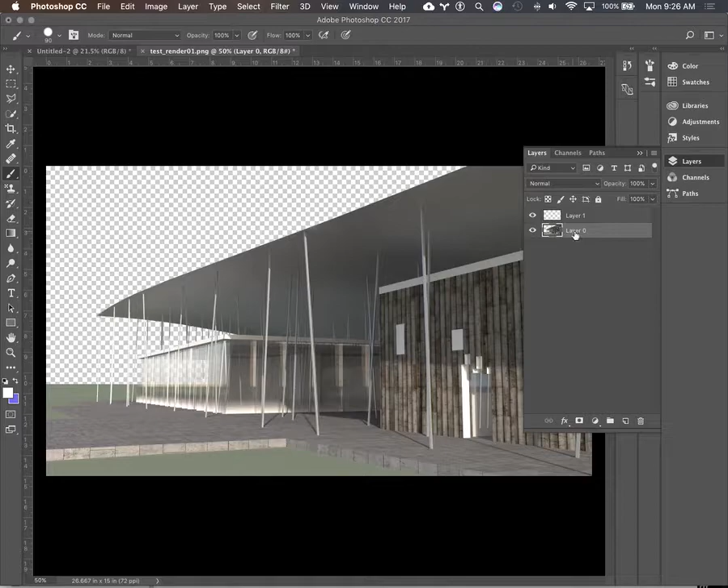Open up my layers, and I'm going to create a new layer. I'm also going to duplicate this layer—duplicate my rendering, because I want to make sure I can utilize that and always have one I can go back to. Sometimes if there's a little lock here, you can click that and unlock it. I'm just right-clicking and choosing duplicate layer.

I'm going to name it, and I'm going to turn this off. So this is the one that I'm going to start working on.

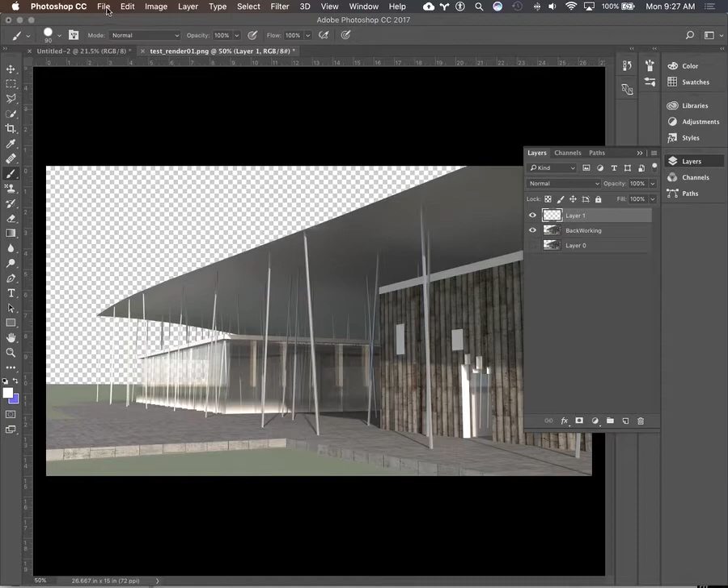I'm going to go to File, and we have two options here: we can place embedded or place linked. When we place a linked file, that means it's linked to that image, so it's always going to go back and reference it. It does two things—one, it makes the file a little smaller because it's only creating a link to it, and it allows us to go back and replace that, and it works really well.

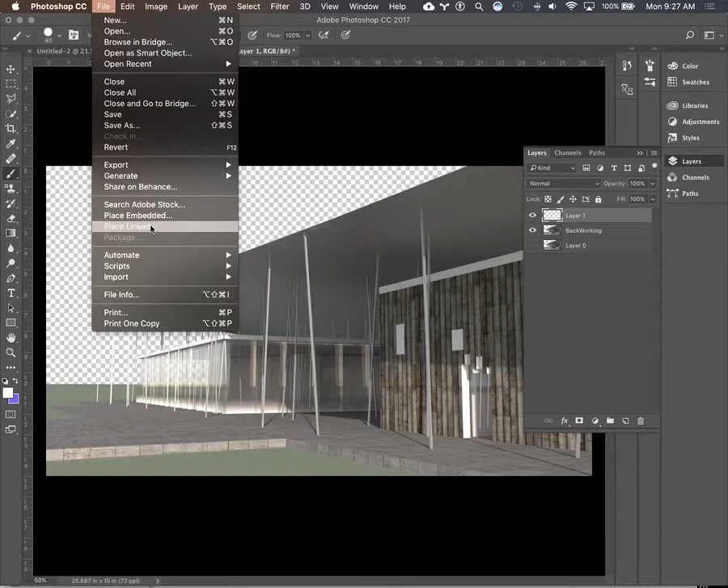The thing you have to remember is that if you're going to share this file with somebody else, you have to package all of those links together—it has to be sent with everything, so you have to almost zip everything together. Otherwise, I'll open it up and it won't link to that file and won't work. But it's a good habit to use linked, so I'm going to do that.

I'm going to go to my textures and use that edge, place that in there. As it's placed in here, to work on it, I might choose multiply so I can see where it's at in relationship to my horizon line and things of that nature—so that's just by selecting multiply. Now you can see here's my horizon line, and here's the horizon line for this.

So I really need to start to bring that down and get that aligned. One thing you could do is stretch this out and make it bigger, and I might not need to replicate the sky.

So if I hold down the Alt key and scroll, I could grab this thing up here and make it bigger and scroll it down. But what I don't like about that is it makes the trees a little too big for what I'm looking for, so I'm going to go back to just making it the width.

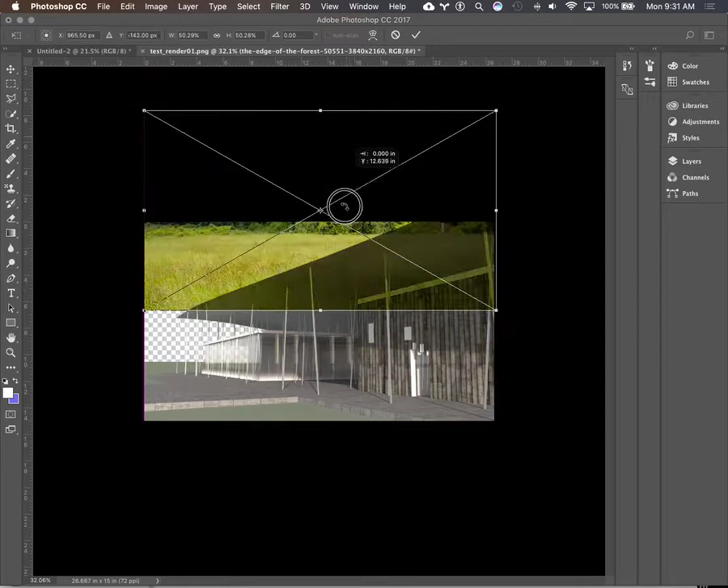And dragging this down—now, one thing you can do also is that when you hold the Shift key and move something around, it will snap to straight lines. So if you just want to move something straight up, hold down the Shift key. If you want to keep it in the same aspect ratio, just use that Shift key.

Okay, so once you have it in place, you just hit Enter and it's locked into place. Go back to my layers and go back to normal. Okay, so the first thing is we have a problem in terms of it being in front.

So I can drag this below—now that it's in the background, you see there's a bunch of stuff that isn't working for us, in terms of we're going to have to get rid of this around here so we can start to see that grass come out into the foreground.

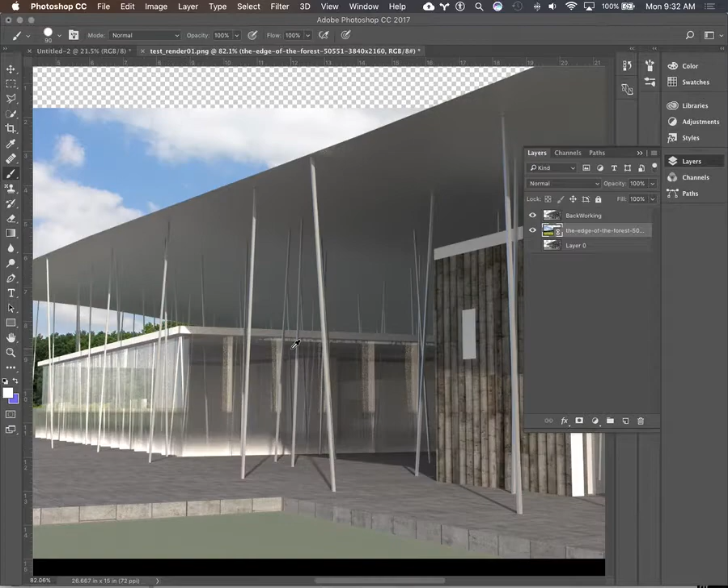But there are a couple things that are really starting to be nice about that texture and those trees in the background. One is that we have this kind of white box, and this darker tree line solidifies that and emphasizes, creates a contrast here, which is going to be nice to keep our eye. The other thing is that this horizon line, along with the angle of this roof, starts to give us some arrows for the eye to come in and then come back into the image.

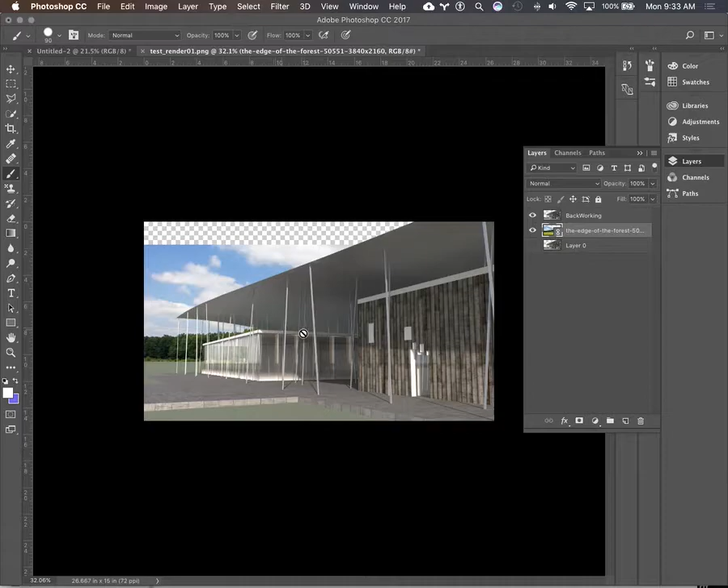So you always want to think about how to draw people's eyes back to where they are, using contrast, using color, and using angles of the perspective. Those are all important.

So the next thing we're going to do is start to layer mask out these areas so that we can take out areas of the image. I want to do it in such a way that I'm not destroying this main image, so I'm going to do that using layer masks.

Right down here is Add Layer Mask under the menu. It looks like a rectangle with a circle in it. I'm going to select that, and now we have a layer mask. I'm going to zoom in here.

We want to get rid of this kind of green area. So making sure that the layer mask is selected, I'll look at a couple of different ways. Since I have a flat background, a single color, I'm going to try the Magic Wand tool. It allows you to just select an area that's all the same color, and if I hold the Shift key down, I can keep adding to that selection.

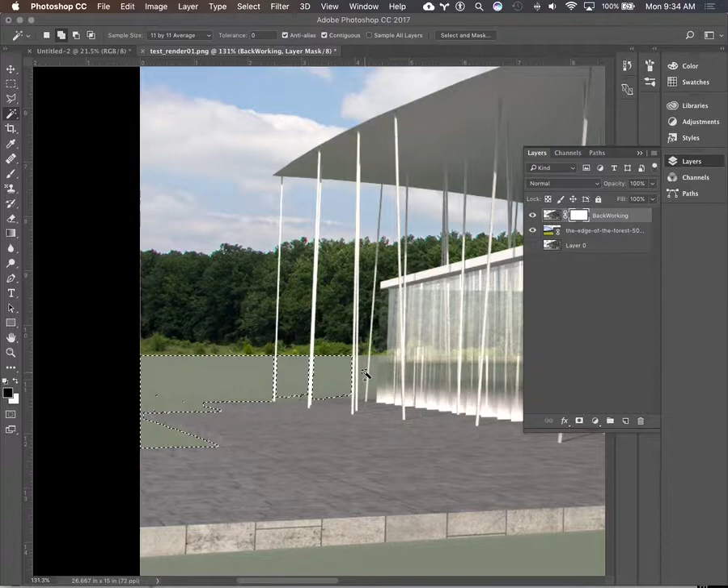But there you see I start to have some problems because the tonal values all start to become an issue. So I can do Control or Command Z and back up. Then I might look at these different sample sizes up here. Right now it's doing an 11 by 11 pixel average. If I want a tighter tolerance, I might start by saying just give me a 3 by 3 average, and I'll test that out.

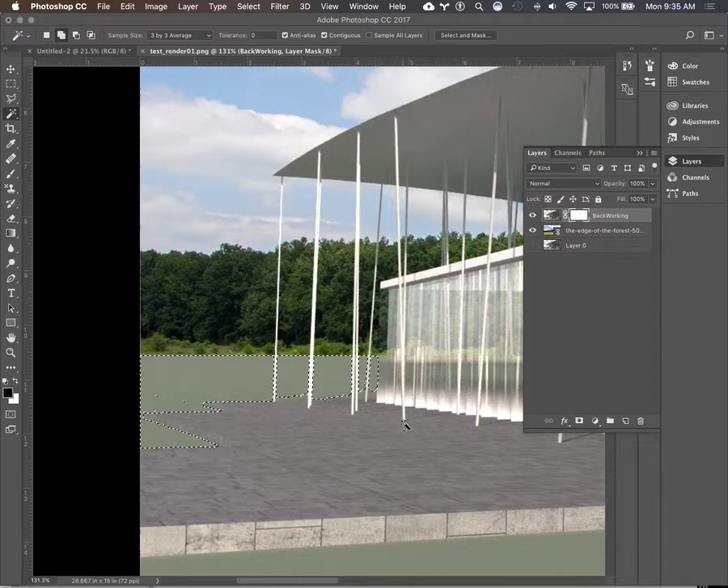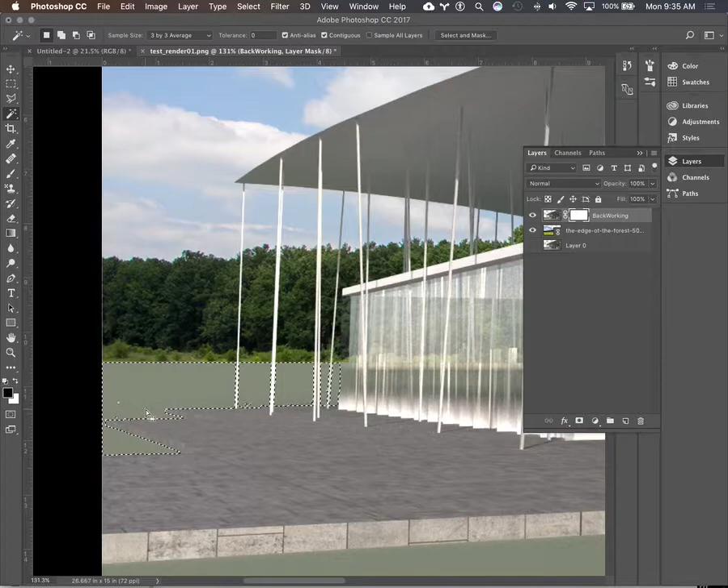And that's working much better. You can zoom in here. I'll just start to clean this up a little bit using the Alt key and the zoom. You'll notice I have some fireflies here that are going to be there - I'm going to fix those a little bit later.

So I'm going to come over here. See, now we're starting to see that, okay, I got a big problem there. So I'm going to Control Z to undo that, and this is where I might turn my setting back to the 11 by 11 average. Holding the Shift key down gives a little plus you can see. Okay, that's a little bit better - that's going to be my first start.

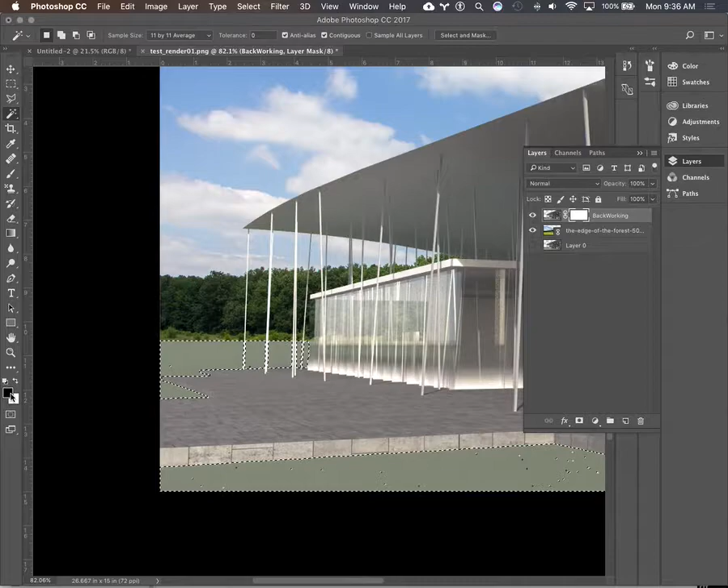You'll notice that the background is white, and what I'm going to do is fill that with black. So I'll do Edit, Fill, and I want that to be black. Now that we have that layer mask, it's giving us our first continuous selection. Doing Control or Command D gets rid of the selection.

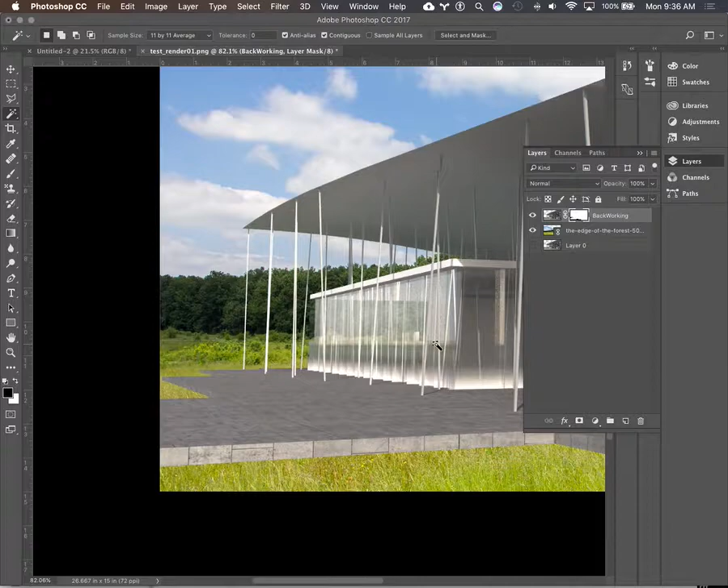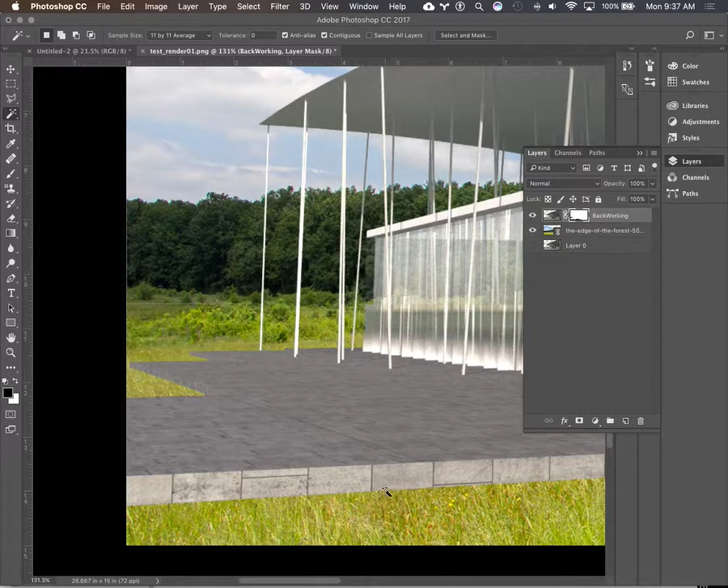So I'm going to come back in here, and I know that right now it's looking okay, but not great - it looks like this thing is floating over there. So a couple of things we want to do is adjust the layer mask to let some of that grass pop up in a more natural way along this edge. We can do that by painting over that layer mask.

Taking this layer mask, making sure that's selected, I can go to my paintbrush tool over here on the side, and I'm going to look at a different brush. Opening up the brushes right up here, we have a selection of different brushes - there's some grass if you scroll down a little bit, these grass brushes. It looks like a single or a triple kind of grass. I'm going to select that.

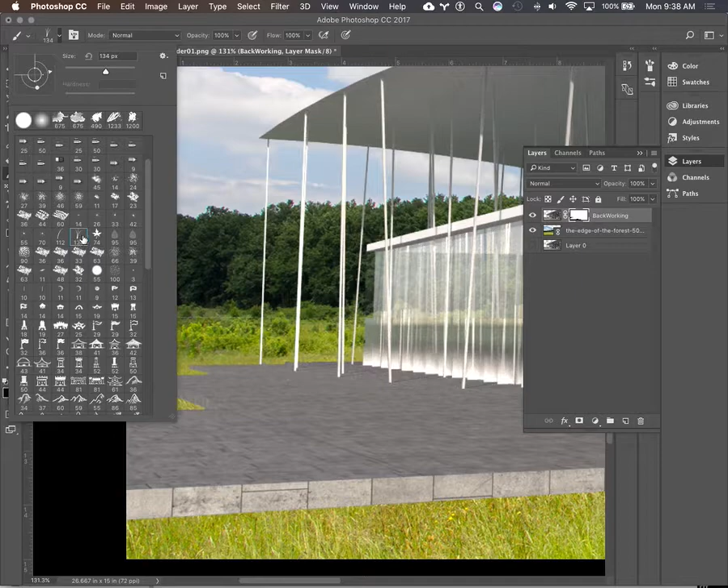I'm going to make sure that my foreground color down here is black, because I'm painting in black. Here's a little quick shortcut - right now I'm not really seeing how big my grass is. If you use the bracket keys, the two bracket keys just to the right of the P, you can use that to size up and size down your grasses.

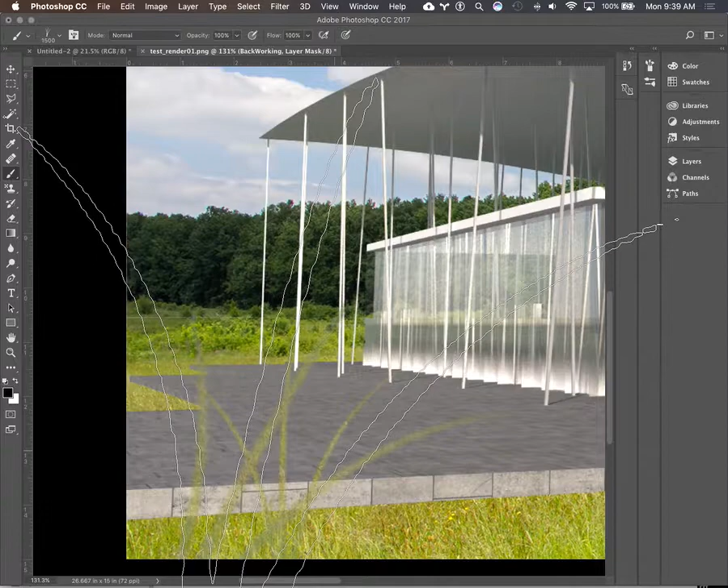Now you can actually see kind of where we're at. I want to go to normal, with opacity at 100% and flow 100% - that's fine to get started. Then, see that gets too big, so I want to undo with Control Z and make this grass smaller. I'm using the bracket just to the right of the P to make it smaller, and the one to the right of that makes it bigger. So I'm going to get it somewhat close to the size of the grasses there.

And I'm just going to start to paint along here, making sure that I'm painting on the layer mask.

And you'll notice that the grass is moving around in different sizes and also in different angles. And what that's doing is it's automatically kind of randomizing what's there.

I'm going to make the background black too, so both of them are black. Because what I was noticing was that it was starting to paint some gray. And so this brush, what it was doing was sampling between the background and foreground colors to randomize and change the kind of colors. So if you were actually painting grass, you could have a darker green and a lighter green, and it would randomize between those to make it more believable. But what I want is to use this as a masking tool.

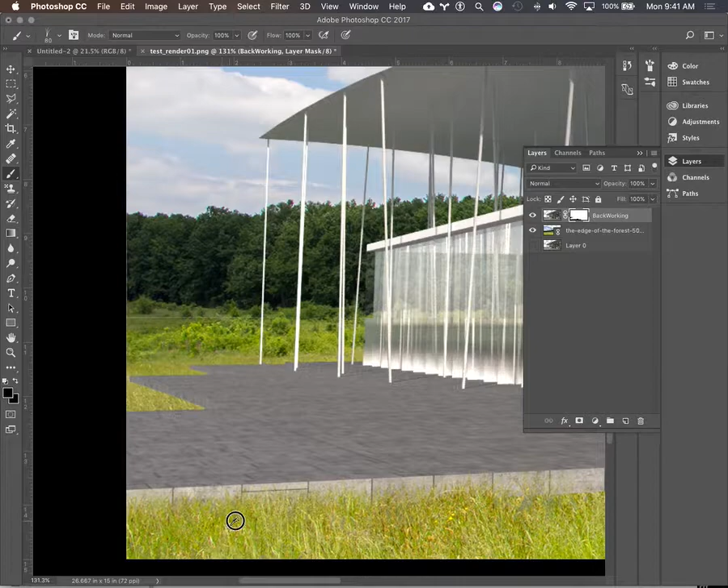So I'm going to make both of those black, so I'm only painting in black so that it's actually masking off this background. And so all I'm going to do is just paint this up. And what I'm doing, as you can see, is that I'm actually kind of covering over that seam where the concrete kind of floats, so it doesn't look like it's floating anymore. It looks like the grass is kind of up to that edge.

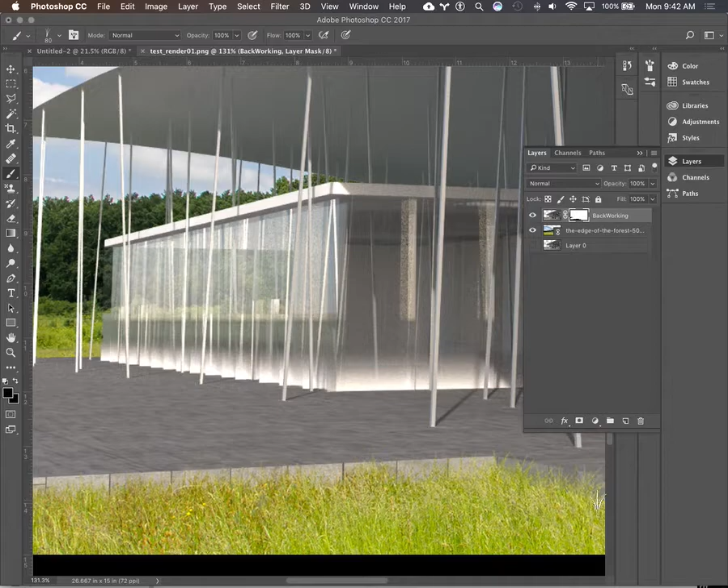And I'm working really on that line in between. So that line in between there, that's what I want to get first. I want to make sure that that gets covered up, and then, if I feel like the grass needs to be a little bit taller, I can start to bring it up a little bit. But right now I want to just make sure that that is clean. Again, when you're zooming in and out, that's Alt and scroll, and when I want to kind of pan around, I just hold down the space bar.

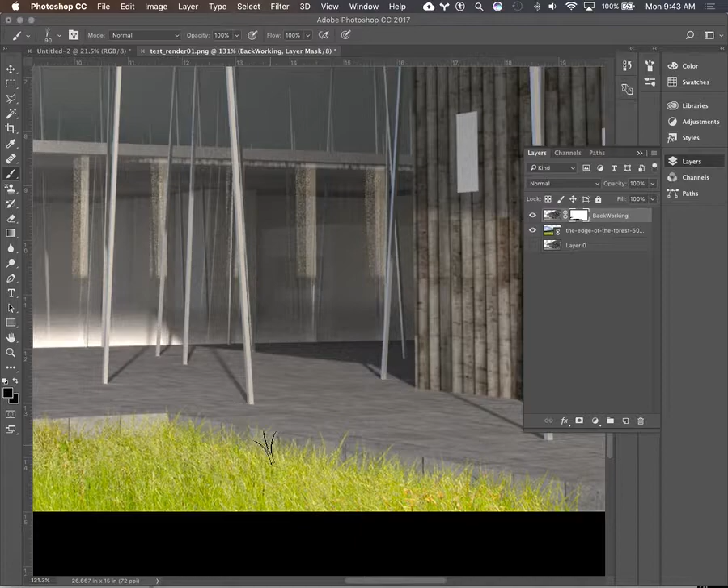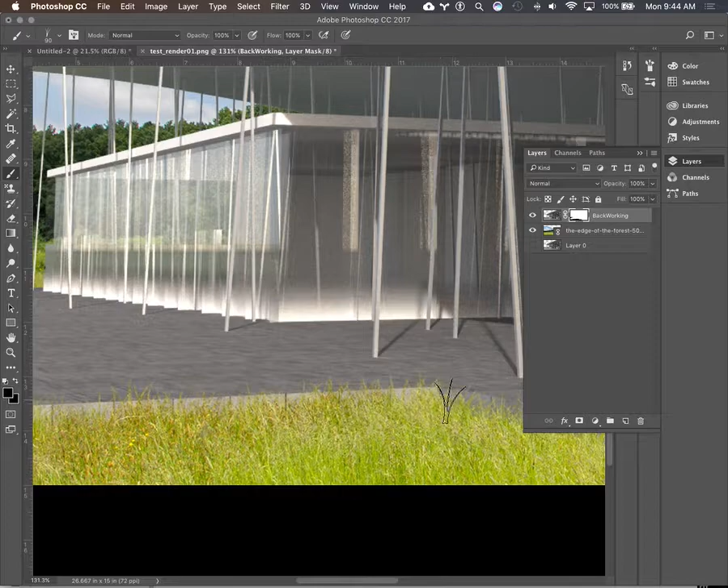And so as I'm getting closer to the camera, what I want to do is actually pump up the size of my brush a little bit, because the grasses are going to be taller and more distinct the closer you are to the camera. And then as I work away, I'm going to make it a little bit smaller. Because this grass seems a little bit taller, a little bit more unwieldy, I'm going to put in a couple of places where the grass, and I'm just doing single taps now, to kind of make it a little bit more...

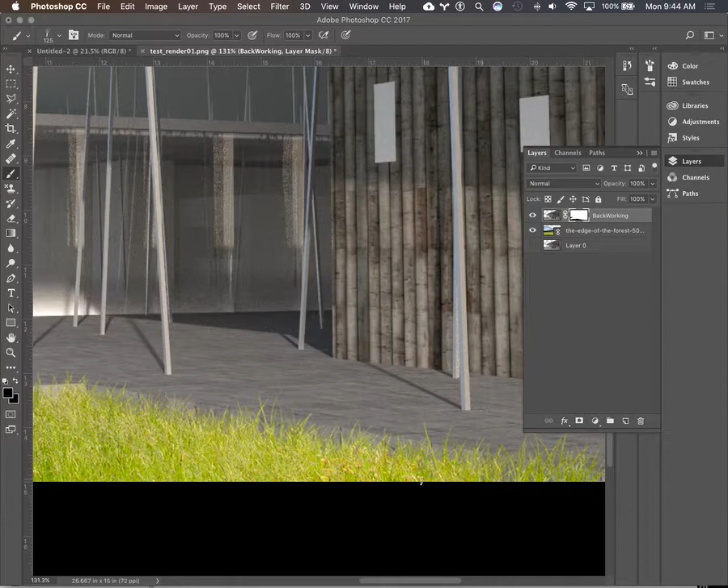So now you can see already that this is really starting to ground that in, and it becomes a little bit more distinct as we get up closer to the camera. A little further away, it becomes a little less distinct, but we've now kind of created this line so that it doesn't feel like that's floating. It feels a little bit more embedded into the landscape. And you want to look for variation and make sure that, like here it's a little lower, it gets a little higher. Make it a little bit more natural.

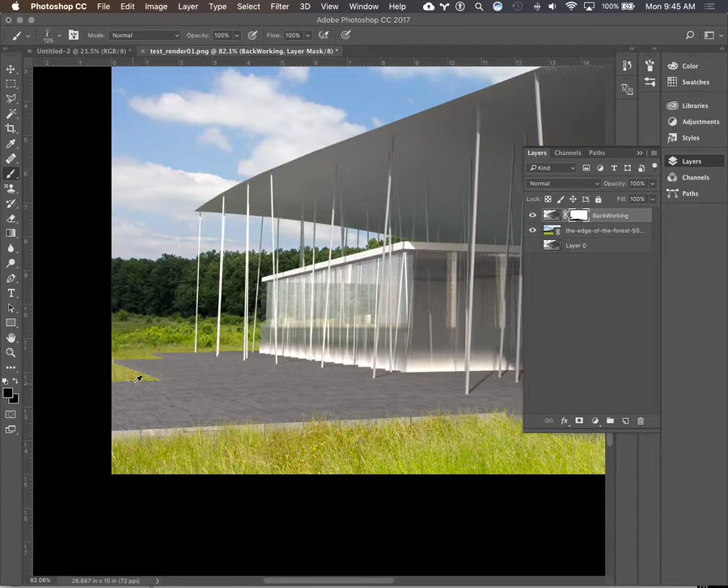So we're going to do the same thing over here, but as we've gotten further away, we need to make that a little bit smaller. The other thing is that we know that we want to keep this line distinct. We don't want this here. So this is where I'm going to come in and actually make another selection using the Polygon Tool, and basically what I want to do here is I just want to protect this area here.

Okay, so I've just made this selection, and right now, if I was to start painting that mask, it would actually only paint in here, exactly the opposite of what I want. So what I want to do is make it so that it paints everywhere but there. So I go up to Select and select Inverse. You don't really see any change, but when I start painting, it will start to work out over here. So go back to the brush. I'm going to make my brush smaller since we're further away from the camera, and I'm just going to, again, start working on this edge over here.

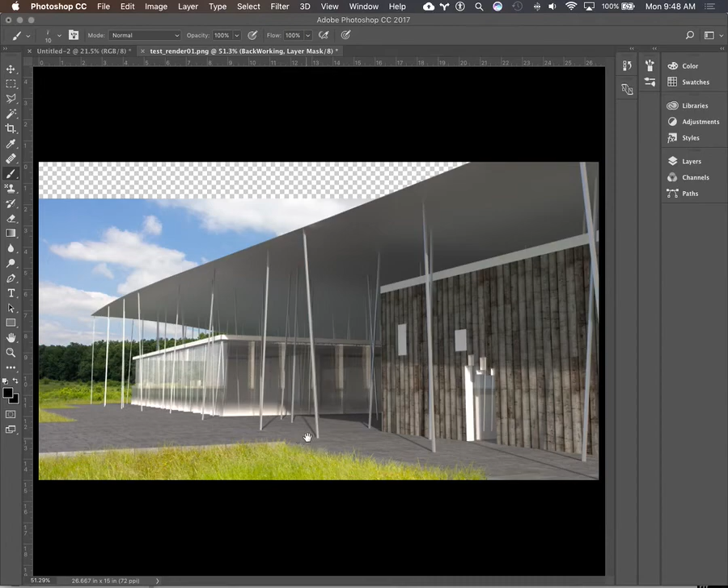Control D to get rid of things, and then I'm going to just zoom out and take a look. How are we doing there? So for the most part, I think that that's pretty good.